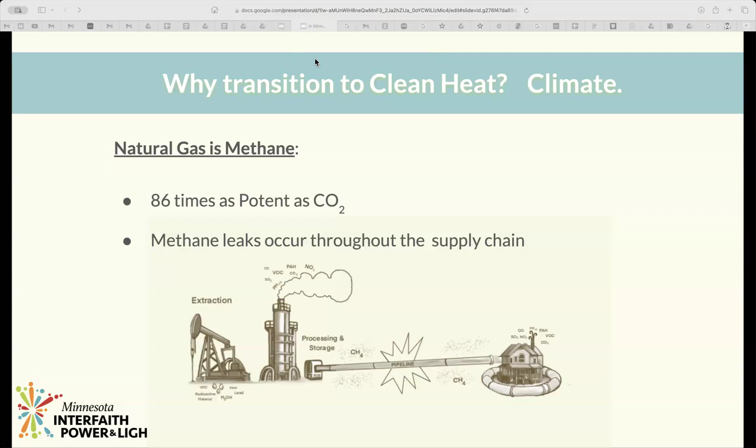And what we have found with recent studies and International Energy Agency data is that the global methane emissions reported by oil and gas companies have been about 95% lower than the actual emissions. So this is a real issue. And even if we had decided to reduce our natural gas use in some capacity by switching one part of our home over to an electrified appliance, for instance, but not switching all of it, we know that that natural gas system still in place is going to be problematic because of just the way the system operates and leaks.

But it's also important to transition to clean heat for our health. The natural gas that many of us are using in our homes is really having the potential to make us sick. We know that it's driving up cancer rates, and it's driving up asthma rates. Cooking with a gas stove, for instance, creates NO2 and NOx pollution, and it releases PM2.5 pollution particles, particulate matter, both of which are lung irritants.

Studies have actually found that 12.7% of childhood asthma cases are attributed to the use of gas stoves. And those gas stoves also emit benzene levels that are above that of even secondhand smoke. And this can be a carcinogen. But it's really important to recognize that these stove outputs are minor compared to the toxic pollution impacts on communities that live near oil and gas extraction and refining sites, which are most often predominantly BIPOC communities.

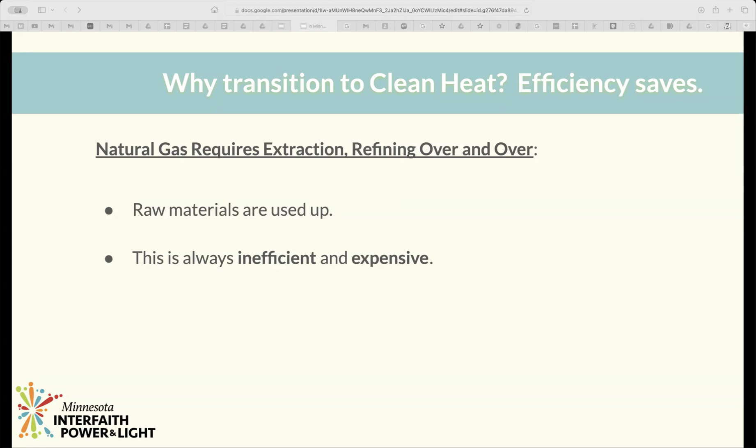And the third reason to transition to clean heat is because it's more efficient, and that saves us. Natural gas requires extraction, refining, and that process is expensive and happens over and over, and we all pay the costs for that. So the next question that comes up in our title is, why clean heat by 2040?

Meeting our climate goals requires early and equitable action. And I know you all care about this. You're here watching this. You're here engaged in all of these ways. And we often think about 2050 as a deadline of really big importance because the Intergovernmental Panel on Climate Change has stated that that is the date by which the planet must be at net zero emissions. If we think about what it takes to get the planet to net zero emissions, what that means is we can't be coming in at net zero at 2050.

The New England Journal of Medicine a few years ago had a really important piece signed by 19 different medical journals. And this is what they said. Equity must be at the center of the global response, and wealthier countries will have to cut emissions more quickly, making reductions by 2030 beyond those currently proposed and reaching net zero emissions before 2050. If we are working towards something, early action is the best action we can take.

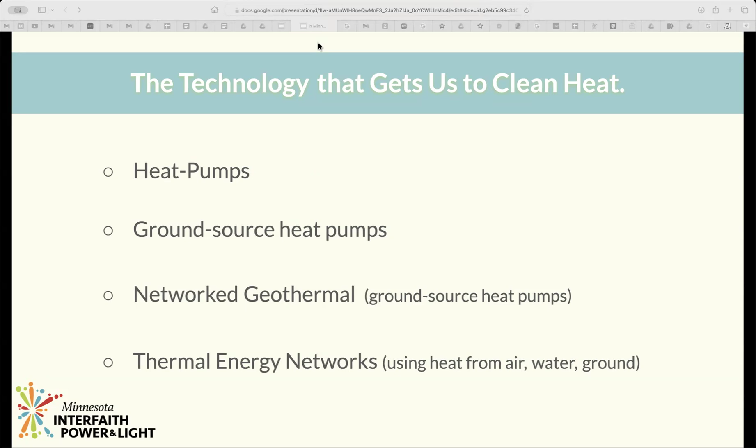Air source heat pumps are gaining steam all over the place. And I would love to ask Brett Pence, our Northern Minnesota director, who is an air source heat pump expert, to jump in here and tell us a little more about the work you've been doing and how air source heat pumps intersect with our transition to clean heat.

Thanks, Sarah. I'm happy to try and impart some of what I've learned. I hesitate to call myself an expert. I'm not a contractor. I prefer energy geek, perhaps, and someone who's been trying to learn about this technology and trying to help people apply it in their own homes and consider it in their own buildings in northern Minnesota. And that's one thing we've been doing over the past few years.

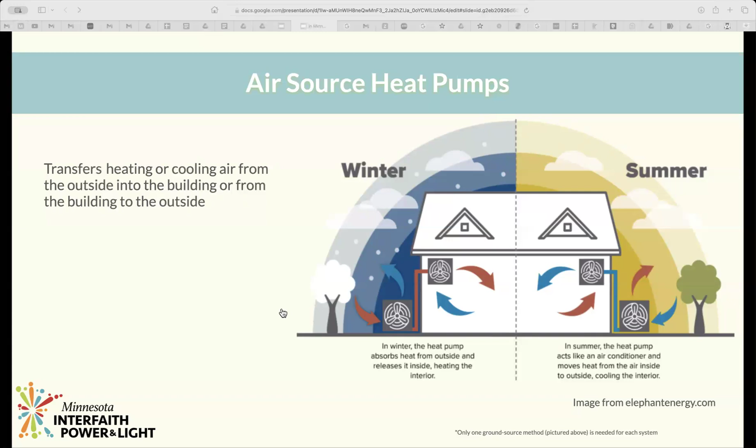You probably know people who have employed air source heat pumps. I see several of you on this call who I know have them in your homes. Joe and JoAnn Ward opened up their home to our interns this summer, who were working on a project that Buff and the interns will show you a little bit later. But they've included so many features, and the reason I'm highlighting this here is that they have an air source heat pump with an electric backup.

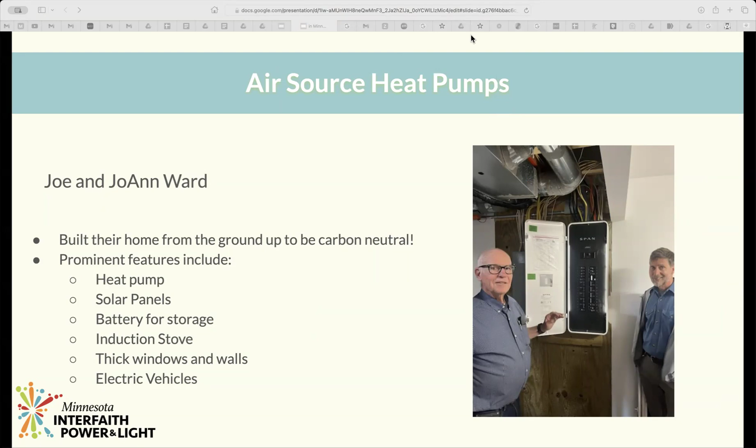So sometimes we hear about, well, we need an air source heat pump with natural gas backup. But that isn't necessarily true. That isn't true. And they're an example of that. And then the good news is that we, for the first time here, have had heat pumps outsell gas furnaces in the United States. So they're on the move. That's great. So that's the air source heat pumps.

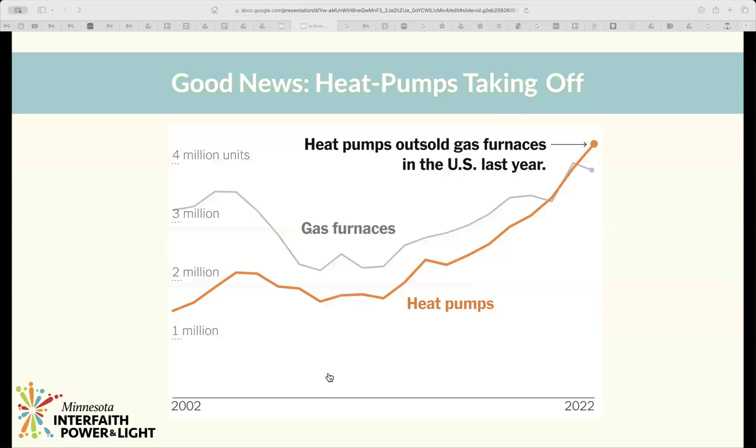We also have ground source heat pumps that transfer heat from the ground into the building. And we have a wonderful array of Minnesota ground source heat pump / geothermal case studies. Minnesota churches, St. Peter and Paul Catholic Church. This is in Elrosa, Minnesota, population 213, employing a geothermal system. And then you have across the state in Moorhead, in Edina, and Mount Olive Lutheran Church in Minneapolis.

The manager of the church building at Mount Olive says, we hope that our bills will be at least half and probably 2/3 of what they were. There are also new geothermal systems. New technologies are being developed. Darcy Systems is one. They installed their system at the St. Paul Steamfitters and Pipefitters, Local 455.

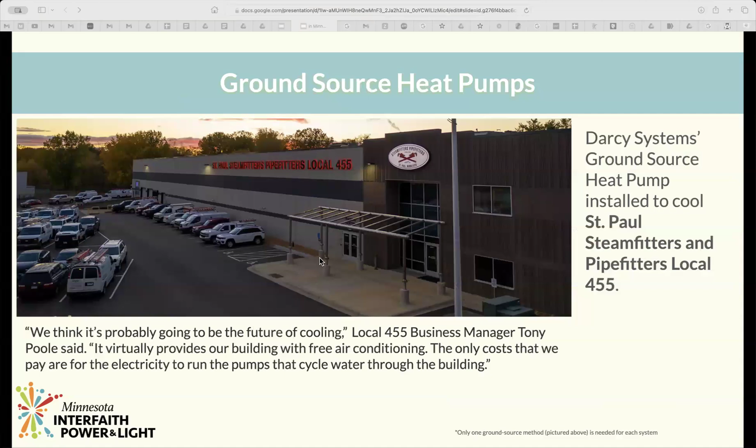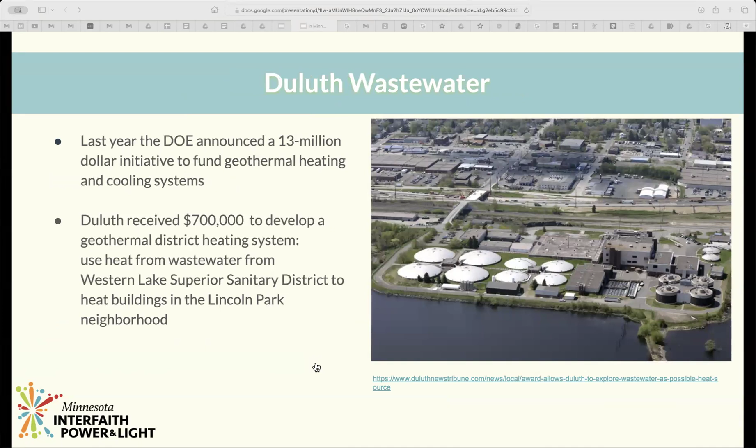They're experiencing cooling costs cut by 85% for their building, and because of installing the system, were able to remove 26 natural gas powered rooftop cooling units since the building's opening in 2015. And then we have networked thermal energy networks, which is this networked geothermal. It's happening across the state. We have examples with Duluth wastewater treatment facilities. It's happening in Rochester, under construction now, with all kinds of buildings with the Destination Medical Center and the City Hall, Public Library, Mayo Civic Center, and they have proposals to do more.

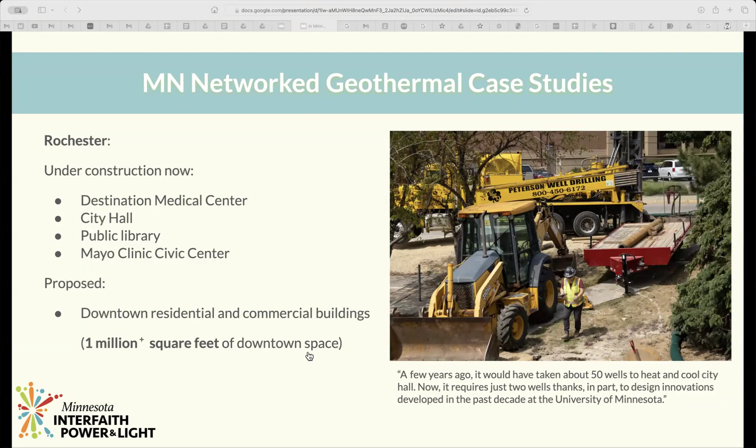Doing this research, though, this isn't necessarily brand new technology. It's taking off, but it's been around for a while. And one of the oldest systems that I know of was put in Milan, Minnesota, in Chippewa County, population 418. It's a networked system connecting their elementary school buildings, a church, and private residences. This was installed in 2006.

And we're seeing that the benefits of these systems are really being taken advantage of by those institutions that are doing lots of building projects. Presbyterian Homes is one, for instance. So we've got a lot of projects going on that we're learning from. There's really limitless potential here. And to talk about that a little more, I'd like to introduce Jim Doyle, who is representing St. Paul 350. Hello, all of the St. Paul 350 people on this call who've been working so hard to advance clean heat within St. Paul. Jim?

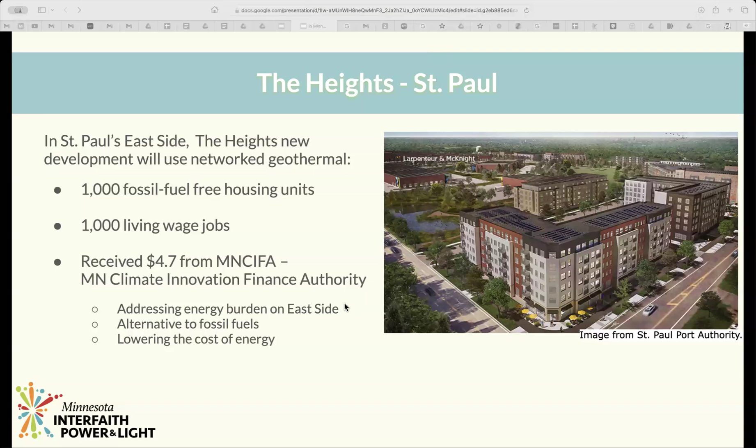Yeah, so I guess that's just what I said. We need to stress that any decarbonization plan needs to be equitable, so low-income folks can reap the benefits of decarbonization. So we're recommending that any plan to pursue this decarbonization is a block-by-block approach instead of a random adoption of heat pumps by those who happen to be able to afford it.

We're also promoting geothermal and thermal energy networks as a way to take advantage of higher efficiencies that you get with geothermal, economies of scale, no need for backup heating, resistive heating, or gas heating, taking advantage of a wide variety of potential thermal sources and sinks, the long lifetimes these systems have, hardware that's not exposed to the elements. So there's lots of advantage to this.

And in addition, good union jobs for pipe fitters. As Sarah mentioned, the local pipe fitters union is very enthusiastic about this. Geothermal is something that can replace the traditional jobs of pipe fitters, which are mainly with refineries. So the pipe fitters see this as the future.

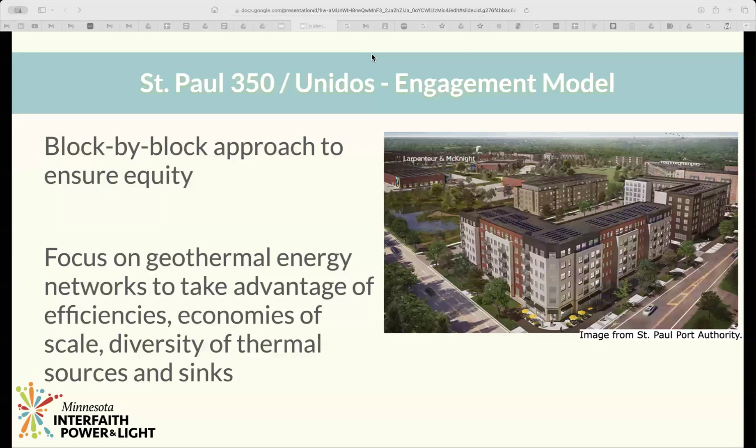So I'm going to then shift from here. We've had a discussion of how all of these technologies are being used and being spread out. What are the barriers that we are seeing to moving forward with clean heat? And I'd offer that there are a couple, and they fall into a couple of categories. One is being delayed by the pursuit of false solutions. And the other is active predatory delay by the utilities and the fossil fuel industry.

I'm just going to break this down a little bit. We've just shown all of the ways that clean heat can benefit our health, our climate, our pocketbooks. But what these new systems do not benefit is the status quo of the natural gas industry. They are working overtime to drive a narrative that sounds something like this. We don't know how to do this. Wow, it's exciting, but how will we do it? Let's pilot new technologies. Let's innovate.

In fact, they were part of passing legislation called the Natural Gas Innovation Act, which dictated spending certain amounts of money on things that we know can't be part of our decarbonized future, but encourage or mandate those natural gas companies to spend money on systems that double down on expensive infrastructure that they will profit from. Utilities profit from building things. And so if they build more infrastructure, that is a recipe for them to receive profits.

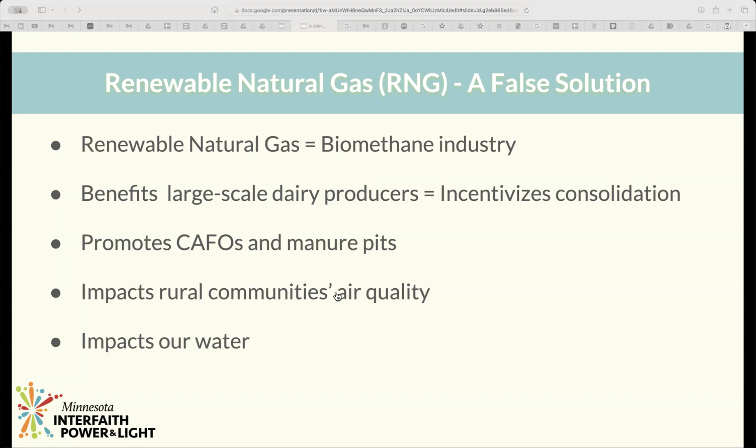So for instance, Riverview Dairy is a system that is investing in renewable natural gas. It's the third largest dairy operation in the world in Western Minnesota, but it operates not only in Western Minnesota, but South Dakota, Nebraska, New Mexico, and Arizona. Their operation actually takes the calves that are born in 10,000 head dairy barns and moves them by truck to New Mexico and Arizona, where they mature there.

And then they move the mature dairy cows, they truck them back to barns in Minnesota. Mature beef goes to CAFOs in Nebraska and South Dakota. This operation moves all over. So this is just to show that this is not your family farm dairy operation.

But when you have a large system like this, and they are able to profit off of something like renewable natural gas, if we create markets for that and expand those markets, whether it's in this state or other states, that creates incentives for systems that are not helpful for our climate or our communities or our health.

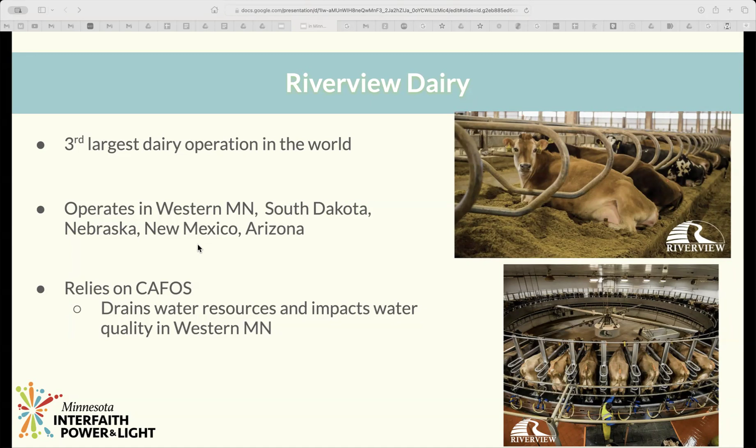Renewable natural gas is one false solution, but also hydrogen is something that we need to be aware of too. Often hydrogen is talked about as something that we need to help us get to that last bit of decarbonization for difficult to decarbonize industries. But no one is really thinking that hydrogen is a good option for heating our homes. So we really need to be selective about the various places where hydrogen might be a real solution and where it's not really a tenable solution for a number of different reasons.

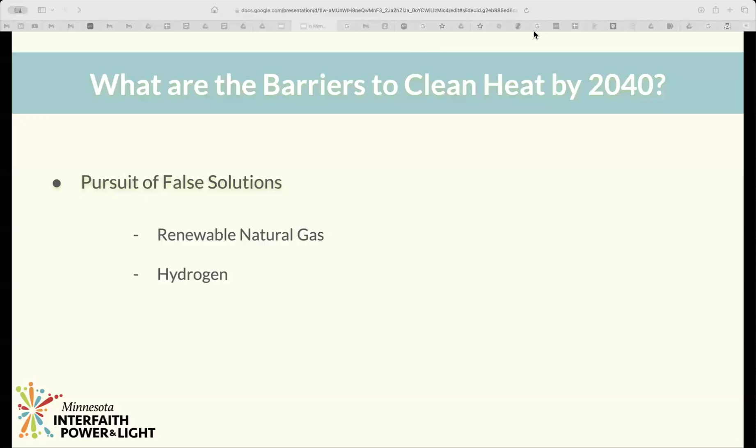And I mention these two because these are elements of Natural Gas Innovation Act proposals by CenterPoint particularly, where their proposal to the PUC said, this is our plan for investing in these items. We're going to do some networked geothermal pilot projects. That's great. We support that. We're also going to do some renewable natural gas, and we're going to be doing some experimentation with hydrogen. And those are the kinds of investments that really detract from what we know will work to decarbonizing heat in Minnesota.

I heard this term not too long ago, and I thought it resonated, and it's important for us to understand. It's predatory delay: the idea that they're actively working to stall the things we know we need to do because they're not directly benefiting their particular industry at the time. So these are the false solutions that we need to be alert to and worried about.

And part of that predatory delay is simply that despite having the technology to not build with natural gas, we continue to see natural gas build out happening everywhere in all kinds of building developments. And we know too that there are incentives put in place by utilities, for instance, CenterPoint, that reward builders who are installing natural gas. Incentives for vacations that they can win and trips and other things. So this is a system that is meant to make sure we're building more natural gas instead of less.

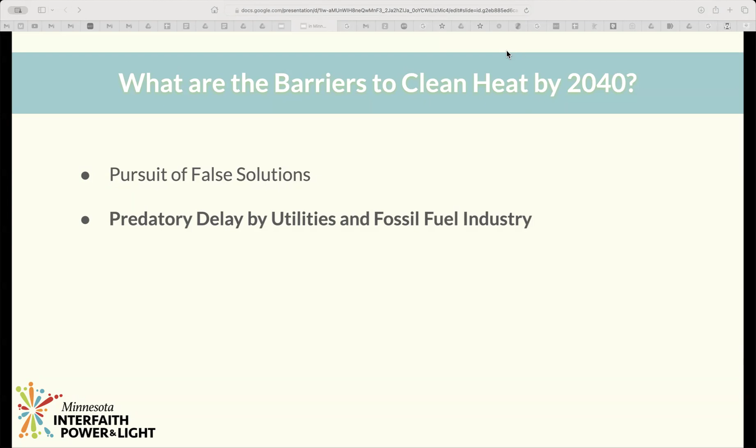So how can we overcome these barriers? This is where we're going to talk about policy a little bit, and then we're going to talk about other actions we can take. There are policy opportunities for us, and the discussions have been started by many advocacy organizations about how we can move to clean heat. You are all well aware that we passed a 100% clean electricity bill in 2023. We need to do something similar for natural gas and for clean heat.

That benchmarking bill is something that we hope there will be increased conversation for. And we need to show our legislators that we are demanding that. The electricity sector has a bill, and now we need these other sectors. Decarbonizing home heat is the next sector. There are other kinds of legislation too that other states have been adopting that are being considered in Minnesota as well. For instance, a utility accountability bill.

And what is this? Well, this is really saying, what is it that ratepayers shouldn't have to pay for? When you are assessed your bill for natural gas, what are you paying for that maybe you shouldn't have to? Is it the excessive executive compensation that utility executives are receiving in the millions of dollars? And by in the millions, I think CenterPoint's executives were receiving compensation in the $20 and $30 million range. Are they the dues to the Natural Gas Association that they pay? And the Natural Gas Association is actively working to promote natural gas.

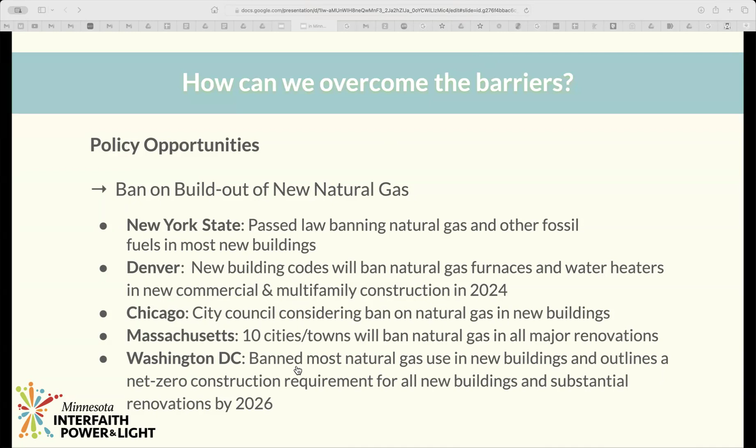There's a study that I'd like to highlight that was just released this summer. The Clean Heat Coalition of Minnesota, which is a number of advocacy organizations that you are familiar with who are participating in this coalition. The Citizens Utility Board, CUB, and Fresh Energy commissioned a study to say, hey, how can we get to clean heat in Minnesota by 2050? Let's compare a couple different paths. We'll compare a path that's full electrification to a path that also includes renewable natural gas.

And the important takeaway here is that the results were that full electrification is better on every front. From cost effectiveness, the costs were simply lower to pursue this path, to health benefits, to emission reductions goals. On all of those fronts, the full electrification path was better. And what's really exciting too is that the study looked at ground source heat pumps, networked geothermal a bit, but it did not really have a large place for that in the transition.

So what we know is that even with a limited amount, we were able to chart a path to 100% decarbonization of heat. But we can do it probably faster and better using all of the tools we've talked about here today.

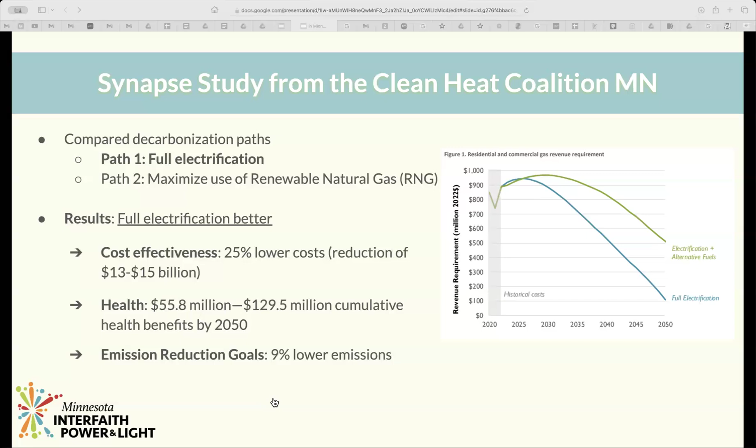So what are the actions that we can take? We're going to be following up in the next couple of days with a big resource sheet. On our website, we'll have a number of resources about the things we've talked about here and different actions that you can take. But here's what I'd really love is for you to make an appointment with your legislator.

Find some friends, some neighbors, other colleagues, have a small group, have a larger group, but make an appointment to say, here's what we'd like to talk about, how we're getting to clean heat in Minnesota, that we need to do this, but we know that utilities are stalling and we must avoid false solutions. So we're happy to help you with arranging those meetings in any way that you would like, but we'd love to encourage you to be engaging in that kind of way.

The second thing is we are collecting through a Google form here and any other way you want to reach us: who would like to join our Clean Heat Policy Discussion and Action Group? We'll be following up with that too. But there are actions we can take that are on the ground and at the Capitol. There's a lot we can do here.

So, with this, I just want to toss it over to Buff Grace and his fabulous team of interns who have been working with MNIPL this summer to talk about their really cool project. Thanks, Sarah. Yep, sorry with my mic there. Sarah's been talking a lot about the barriers and the landscape of policy at the large level to get into clean heat. We're also working at the local level, at the household level, trying to help folks in our faith communities, spiritual communities do this.